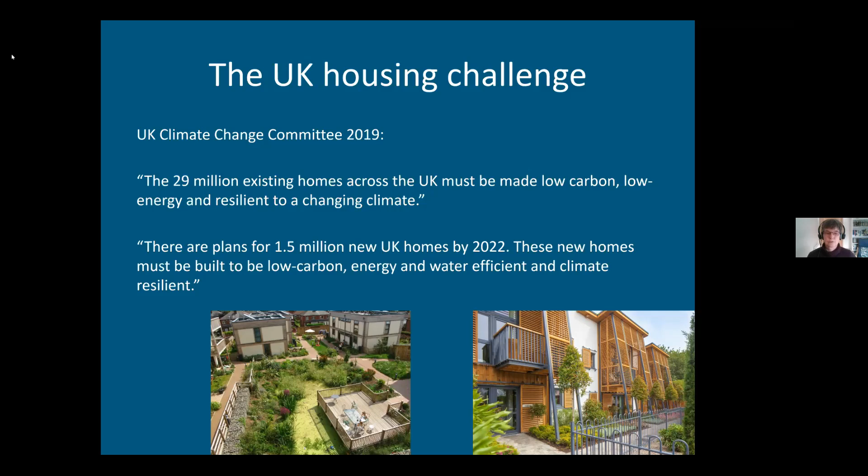And really, to set the background, the challenge is that we've got 29 million homes that are not fit for purpose and that we need to upgrade. And we're also trying to build a whole bunch of new homes very rapidly. And of course, these need to aim for zero carbon.

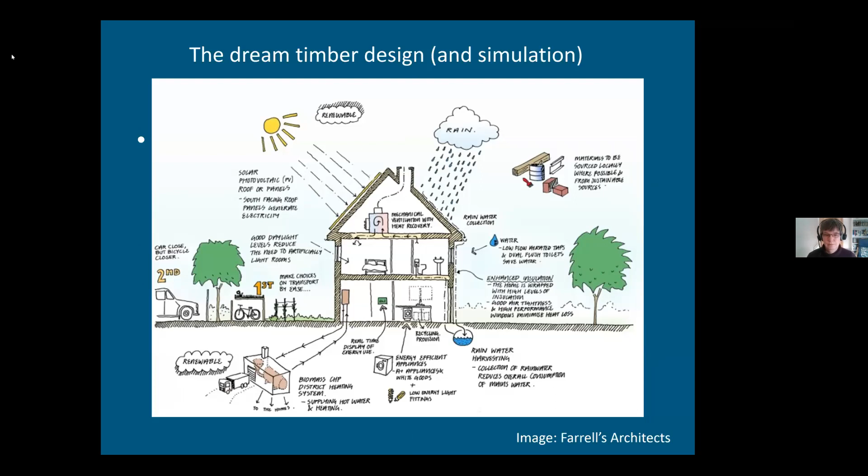This is the sort of typical drawing that we as architects start out with, the dream home, this one by Terry Farrell. But unfortunately, design intentions very often don't get met in reality. Here we've got three quick images, one on the left of residents desperately trying to create cross ventilation to cool their home using the traditional chair to wedge the door.

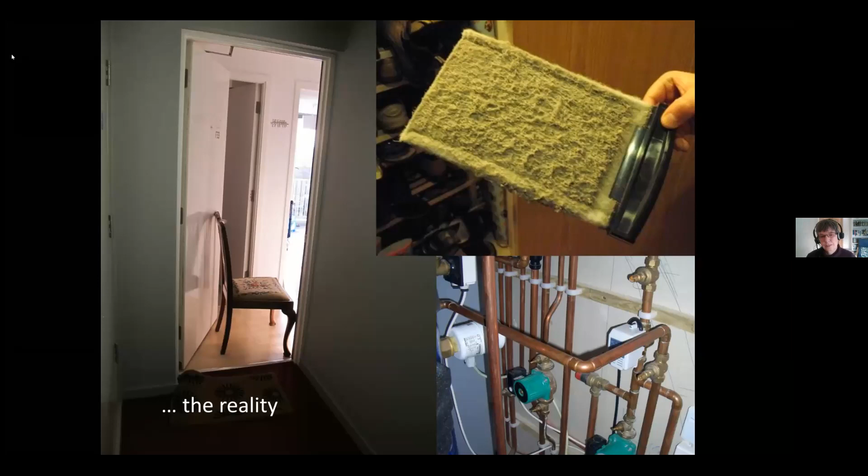Top right hand side, we've got a very filthy MVHR filter that not only the residents weren't aware of, but also the housing association wasn't aware of it either. Bottom right is good old fashioned plumbing. And unfortunately, we still see instances where plumbing is not properly insulated.

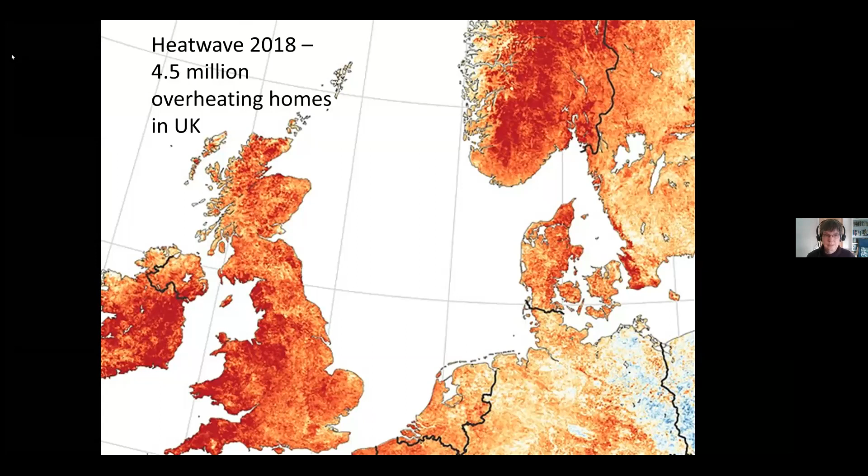The bigger picture, we had 4.5 million homes overheating in 2018. That's only set to increase. We also have about 5.5 million people suffering from asthma, and that is increasingly being related to issues in the home, whether it's toxic materials or simply mold from poor design.

So our homes are underperforming, and we regularly see homes using 2 to 3 times the amount of energy that they're supposed to be using. And that isn't just down to the occupants, it is often down to design and construction issues. So why is this happening? Well, basically, our design intentions are only as good as what we already know. There's no legal requirement to provide feedback from reality once we build our buildings. And so, quite honestly, we don't know what's going on.

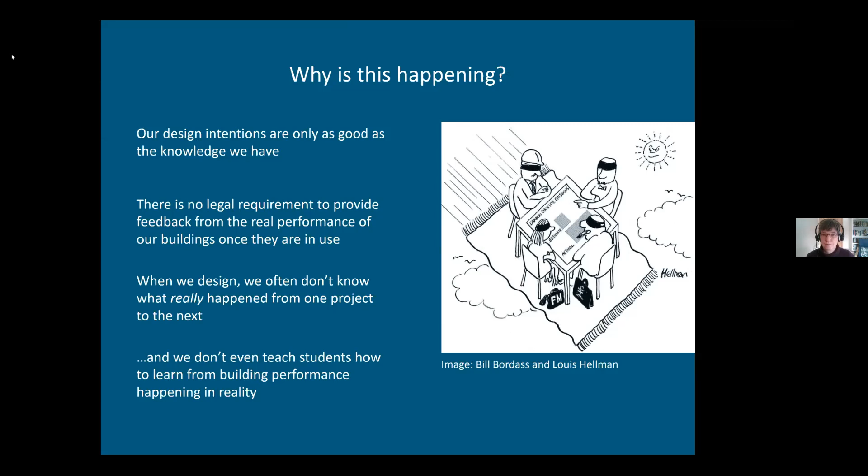And that's why I love this cartoon by Hellman, which shows the whole design team flying blind because we don't get feedback. And we don't even teach our students how to get feedback from buildings. So why is it a great thing to do post-occupancy evaluation, or the wider aspect of building performance evaluation, which means looking at the whole building cycle? Well, there are 7 reasons.

Basically, if we do POE as part of a wider building performance evaluation cycle, we can improve our products, our design, and we can improve the design process. We reduce risks and hidden liabilities by exposing them early on. We reduce defects by understanding them through looking at them. We reduce maintenance, again, by understanding what really happens once our buildings get rained on. We can future-proof our buildings by understanding how they're behaving in reality.

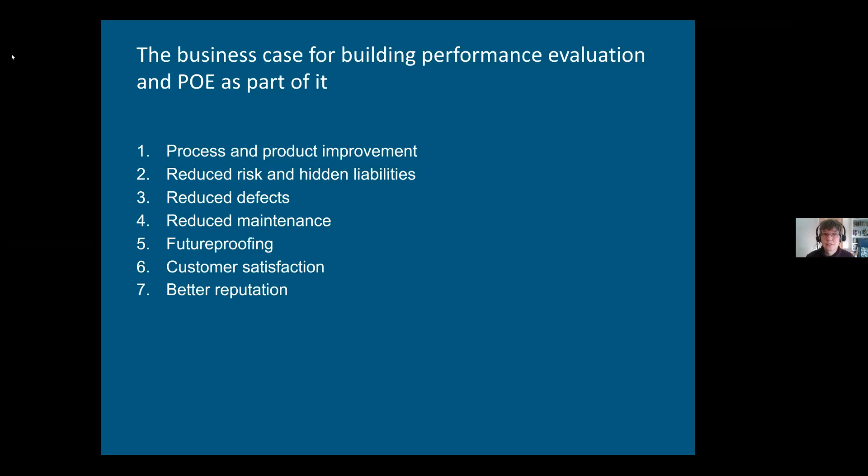And all of this will lead to improved customer satisfaction, a better reputation for us as designers. And what does that mean? Repeat business. So 4 quick questions when we're doing POE. These are the basic 4 questions everyone needs to have in their head. Is the home performing as it should be? Are people happy in their home? Are there any immediate problems? And how can we improve design and homes for the future?

We basically need to do this also to validate the very design modeling tools that we're using. Modeling tools are only as good as the feedback given to them, which is why most modeling tools are not particularly accurate. So when we're doing our performance evaluation for real, this is a key slide. We need to compare the design intentions to reality. That means looking at the original specifications and drawings and understanding any changes that happened. We need to look at a bunch of hard data, physical comfort factors, possibly pollution levels, certainly looking at the fabric performance, the energy use and the water use.

Then we need to look at the essential soft data that often gets left out of monitoring. And this is not just a customer satisfaction survey. This is about looking at people's needs and their capacities to use the buildings we design for them. And that's a different way of thinking about post-occupancy evaluation, not satisfaction, but whether the buildings we've designed are designed for the capabilities that people have. And that's particularly around control and learning of the equipment that we put into the homes. We then compare the hard and soft data with the original design intentions to revise and improve our design, and also to future-proof them.

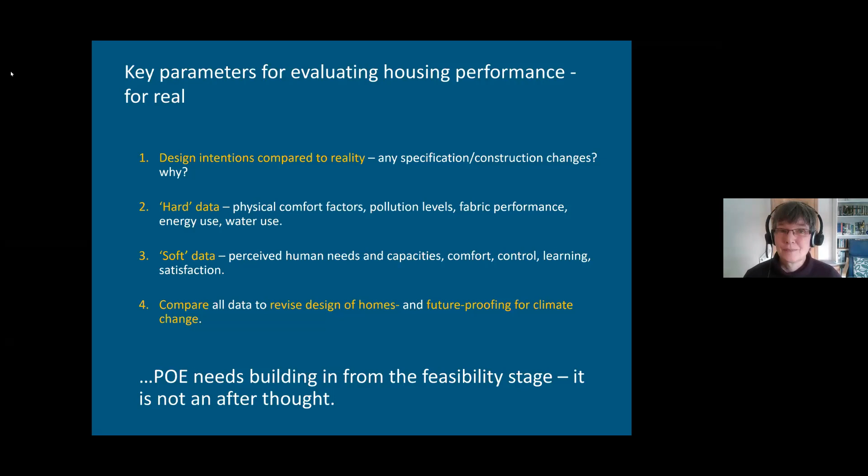Now, if you want to do this, you need to build in POE from the very beginning. Don't start thinking about it whilst you're designing. It's too late. It needs to go in at the beginning with the client at the briefing stage, at the feasibility stage. Otherwise, it becomes expensive. The other thing is POE can be cheap, very cheap. To do a light touch POE may be as little as £5,000 for a housing development, possibly 10. And once you've done that, if the home is performing as expected, you don't need to do anything else. You don't need to bean count. You don't need to do monitoring for the sake of monitoring. But if there are issues, you need to move down to the next level.

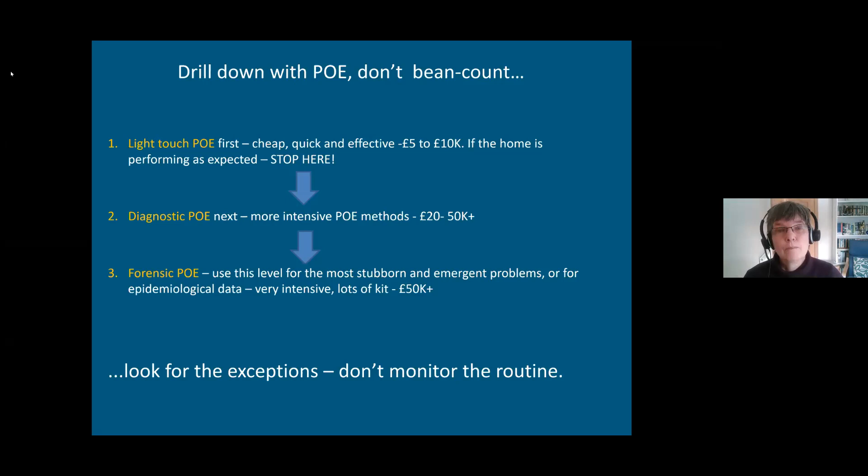Then you need to start diagnosing the issues that are thrown up by the light touch POE, and that is more expensive. And finally, for the most stubborn problems, you need to use forensic methods. But the key takeaway from this slide is you should be looking for exceptions, looking for things that stand out as not normal, not monitoring for normality.

So I'm going to introduce you to 6 initial actions that you can do very easily on any design project to get you going with POE. The first is to look at what the documents were, the original design documents and the specifications, and check those against the as-built. The next is a very basic energy and water use audit. And you can get this either from smart metering, or if you're dealing with old homes, you can get it from the bills.

The next is to do a thermographic survey. That does need some expertise, but just looking at one typical home inside and out can give you a wealth of data. Once you've done these, and these are in order, don't do them out of order. The order is logical. Once you understand the documents, the energy and water, and the thermographic survey, then it's time to ask the inhabitants what's going on. Quick survey, I'd recommend the BUS questionnaire or the equivalent.

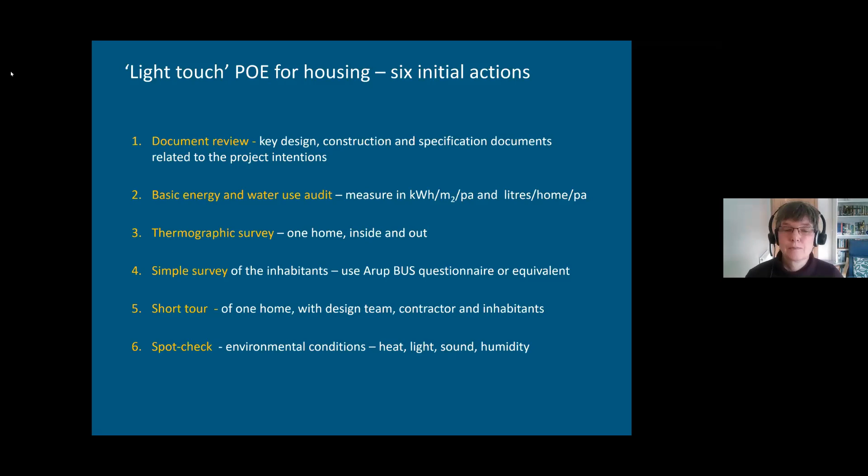And once you've done those and you have some understanding of what's going on, then it's time to do a quick walk around with the design team, armed with the information that you have from the first 4 methods, and to discuss what's going on. That will give you a much more valuable short tour. And finally, whilst you're doing the tour, you can do some quick spot checks. You can check the temperature, the light, the sound, and the humidity in the building on the spot and compare it to what the occupants are saying.

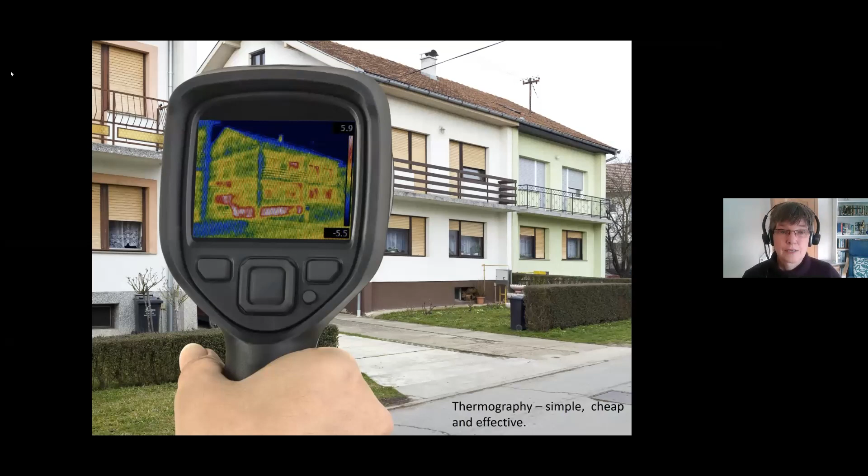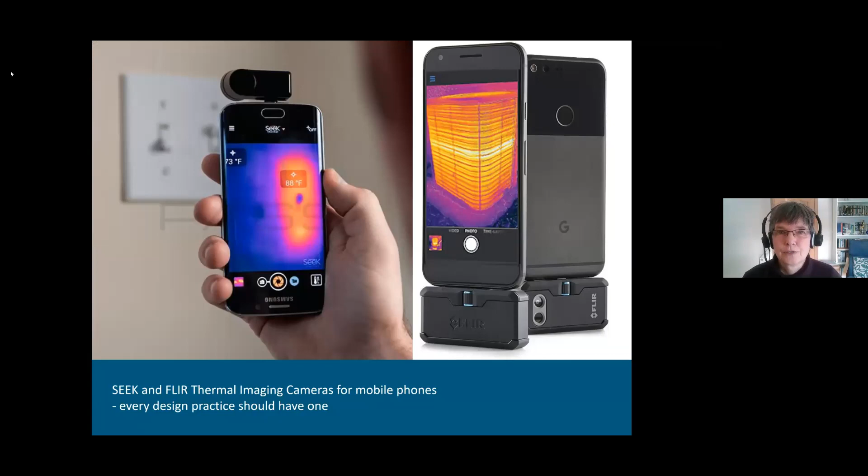You can do it via the phone. There are very simple devices now that you can attach to your phone for £200 or £300. Pop this in your pocket, take it out on site and use it. It's criminal that we're not using these already. You can also invest in one of these, which is a simple 4-in-1 meter, not particularly accurate, but it does give you on the spot ballpark readings. If the occupants are saying that it's too hot in the home, it can be well worthwhile doing a few spot checks on a home tour to see whether that's actually being borne out, equally with the humidity or the noise levels.

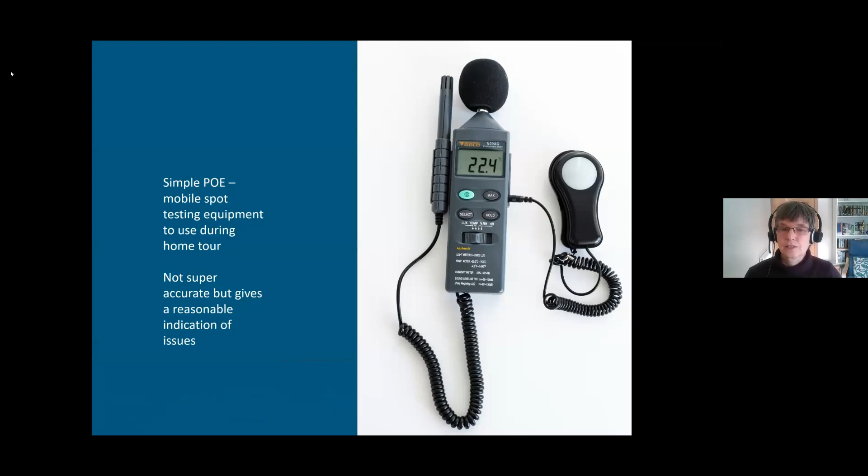So I'm going to just spend a few minutes now taking you through a case study to show you POE in action and making a difference. So this was a study we did a few years ago in the north of England, a very well-known architecture practice I'm not going to name. We're looking at a 1960s block here, of which there are many that need significant retrofit. This was a deep retrofit done. We went in to do a light touch POE, which we then needed to follow up with a diagnostic POE to understand what was happening.

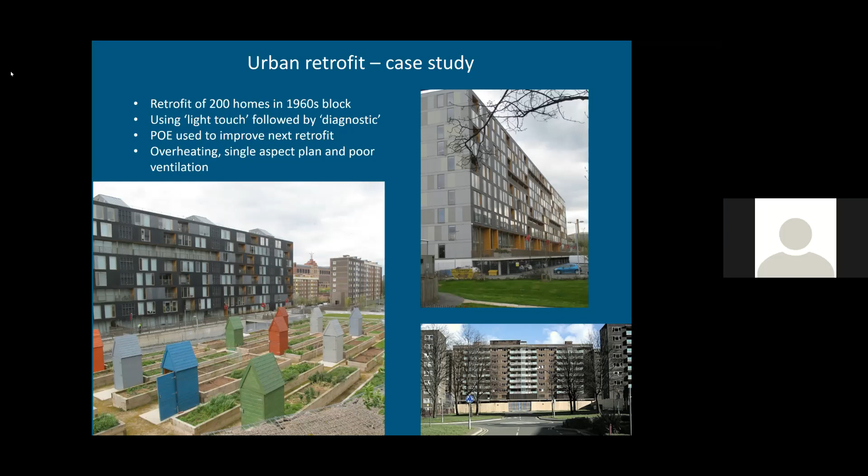The big issues that came out with this particular project were overheating, the fact that the architect had turned a perfectly good plan with cross ventilation, a generous housing plan, into a single aspect plan. And a single aspect plan, believe me, I know they're sexy at the moment, but they are time bombs in terms of ventilation strategies. Please avoid single aspect. I'll show you the reason why. This is what we discovered. Here is the single aspect plan.

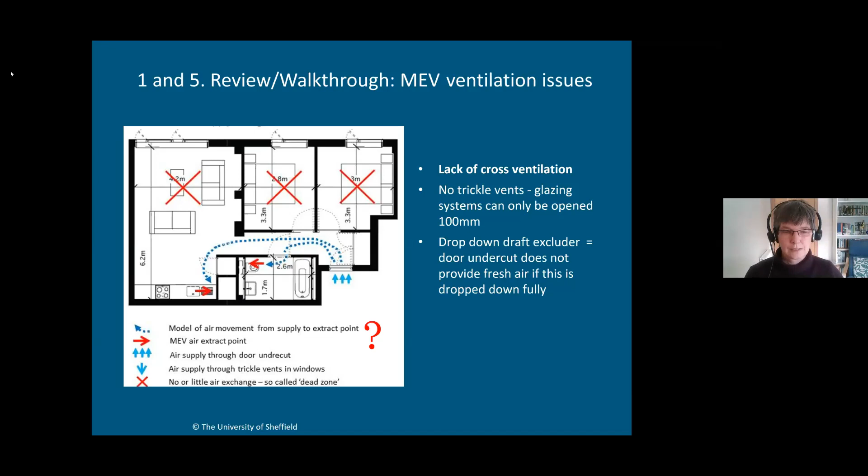And once we'd got the questionnaire back from the residents, we did the walkthrough. We'd also looked at the drawings, and we worked out very quickly that there's what we call a ventilation bypass. So what was happening here was there were no trickle vents. Any glazing that was developed could only be opened 100 millimeters. That's really small. And the drop-down draft excluders were not allowing, there was a conflict between fire regs and the need for ventilation. So basically we had a pressure cooker here, where the mechanical ventilation was extracting from the front door through the cooker, out through the block, and none of the rooms were getting decent air. So we had to go in depth, and that meant we had to start measuring airflows.

And we then were able to forensically diagnose that, in fact, the mechanical ventilation system installation was appalling. There were meters and meters of flexible ducting, which of course should be minimized for any MVHR installation. The commissioning was incorrect, so the flow levels had not been properly calibrated. I mean, basically, it was just a disaster.

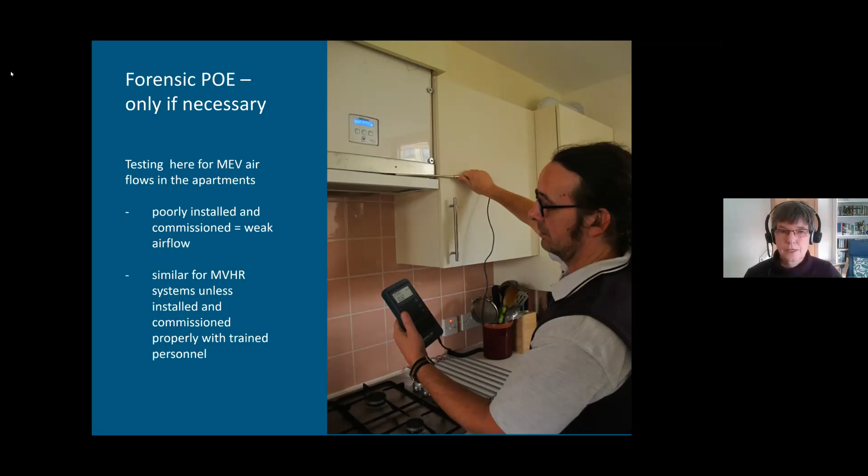And we then looked at the energy use, and normally people say, well, the energy use is due to what the occupants are doing, and that can often be true. However, the energy use was consistently over what had been predicted. And reasons for that excessive energy use were people were beginning to bring in their own devices to do their own cooling, because the design fault was that the buildings were overheating.

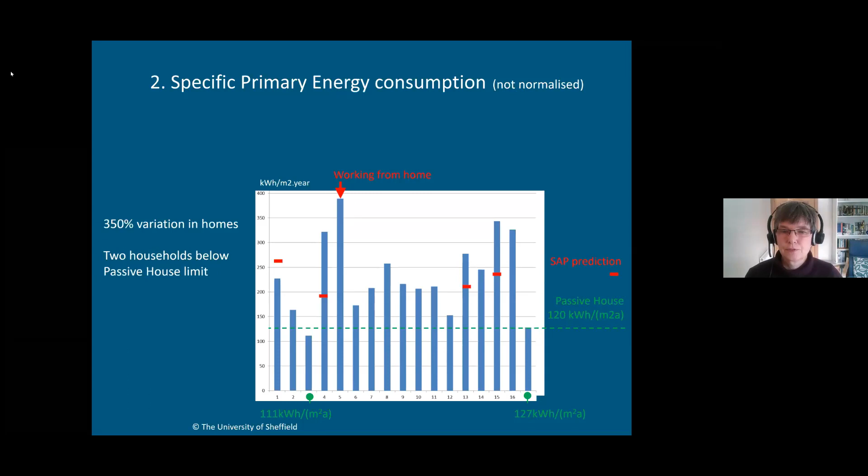So we did some thermal imaging, and one of the interesting things we found immediately was a stack effect. This is called stratification. You'll get this a lot, not only in blocks of housing, but also within the home. Key law of building physics is that heat rises and cold will drop in to replace it. So here we have a stack effect within the core, the stair core of the building. And of course, that heat then diffuses into the flats.

So basically, if you lived in the top flats, you were getting cheaper heating in the winter. And of course, the ground floor was a lot cooler, and that was performing as designed. But the top floors were a lot warmer in the winter and really difficult to cool in the summer.

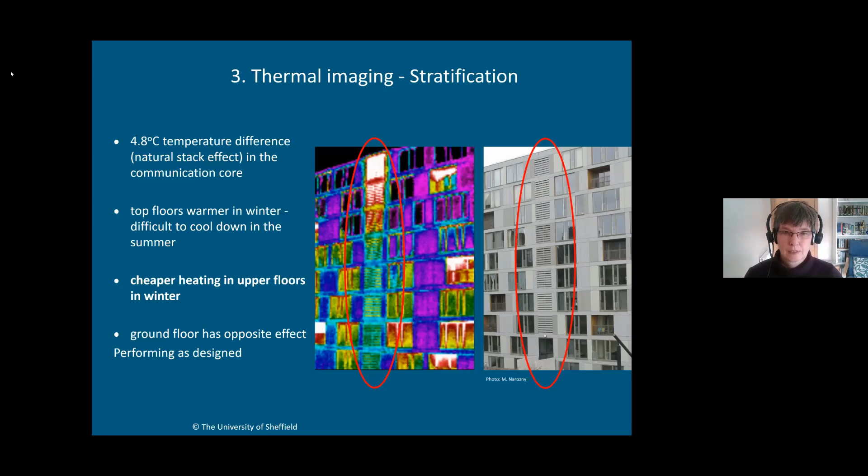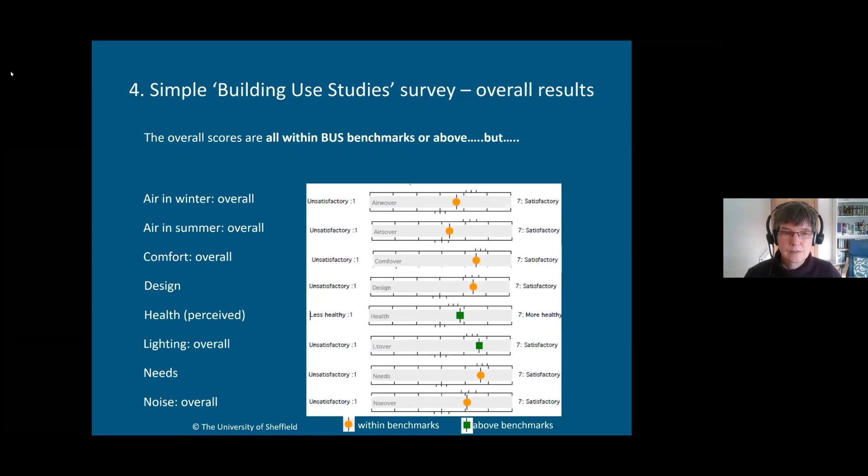So we asked the residents what they thought. This is a quick overview of the different questions that are asked of the occupants in the BUS questionnaire, and it looked from the BUS survey, having asked all 200 residents what they thought, that basically this looked okay. The amber shows that it was within the benchmarks, and the BUS survey has thousands of studies now from offices, and hundreds and hundreds from housing developments. So they're very good, robust benchmarks. And we could see here that in terms of health and lighting, the homes were doing well, and they seem to be doing okay on comfort as well.

However, when you dig into the detail, it's a well-known psychological fact that if you ask someone generally how they're doing, they'll say, fine. And if you then drill down into some detail and ask them more specific questions, they will often say, not fine. So someone will say, fine, if you ask them how they're doing. And then if you ask them, how are your feet today? They may well say, well, actually, I did twist my ankle last week, but it's healing up okay. And exactly the same happens with buildings.

So people say they're generally happy with the building. There's a big forgiveness factor, maybe because it's a sexy looking design, and actually they will compensate for the fact that it's not performing because it looks good. But as you can see here, massive issues. Severe overheating in the summer and severe cold in the winter. And there are the red dots. So it's important with POE that you do dig in and just don't accept things at face value.

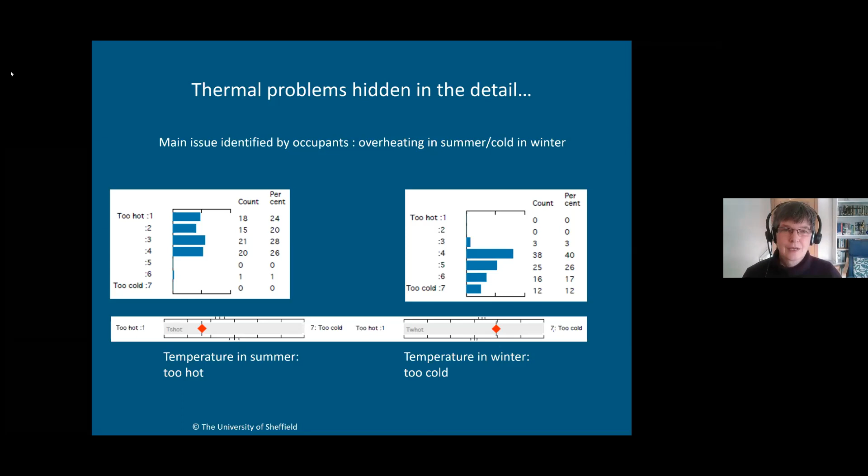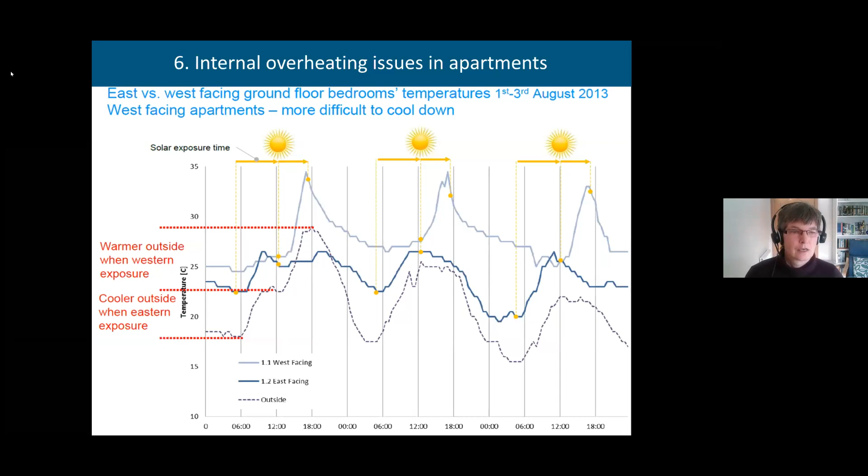Now, why was this happening? When we started doing the forensic monitoring, not just the spot checks, but now looking at more detail, we found that the western single aspect homes were just set up to cook. Huge windows, no shading, looked very good. And facing the west. So, of course, what was happening was massive warm up. West-facing windows, large windows are probably the worst in the summer because the house is already warm when the sun continues to shine in the afternoon and the evening. So we were getting regular 35 degrees inside when the temperature outside was a lot cooler.

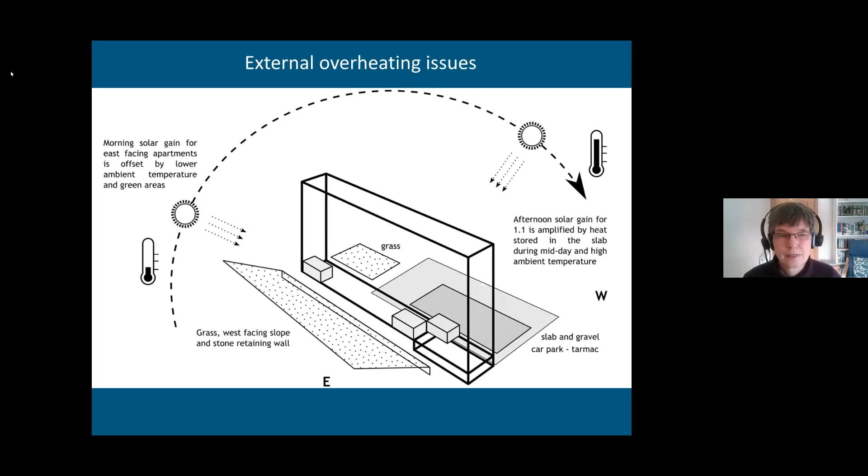And what we did was we diagnosed further, and we discovered, as you can do with POE, that there were other bigger issues. And here we have an external environment issue, which was the block was designed and renovated whilst the existing car park was not, and that's black. And basically you have a great big black heater there throwing heat into those western facing apartments. So again, really set up to cook.

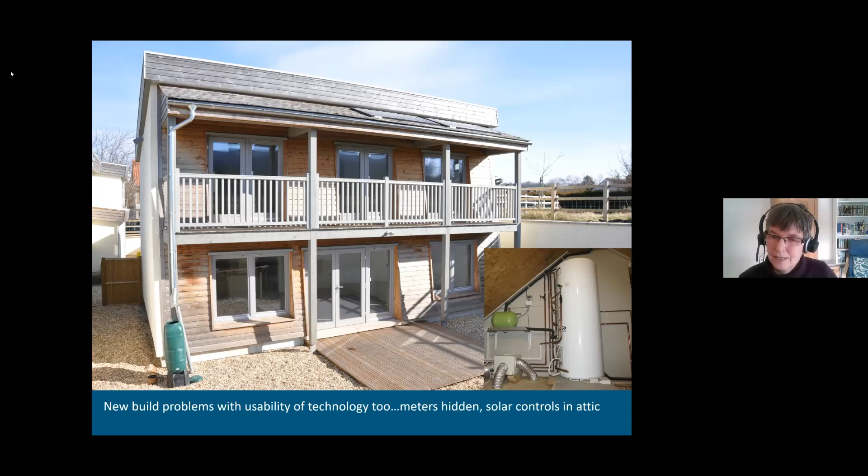So other great things about POE is you can actually use it to validate your design intentions. So if you're dealing with retrofit situations, this is an Oxford study by Professor Rajat Gupta from Oxford Brookes University. And here he actually interviewed the occupants and audited the energy before even doing the POE. So he established benchmarks, reality benchmarks, before the retrofit was done. He also asked the occupants what their real needs were, and he built that into the POE design, which gave a fantastic result at the end, a finely tuned POE that actually really paid attention to the residents.

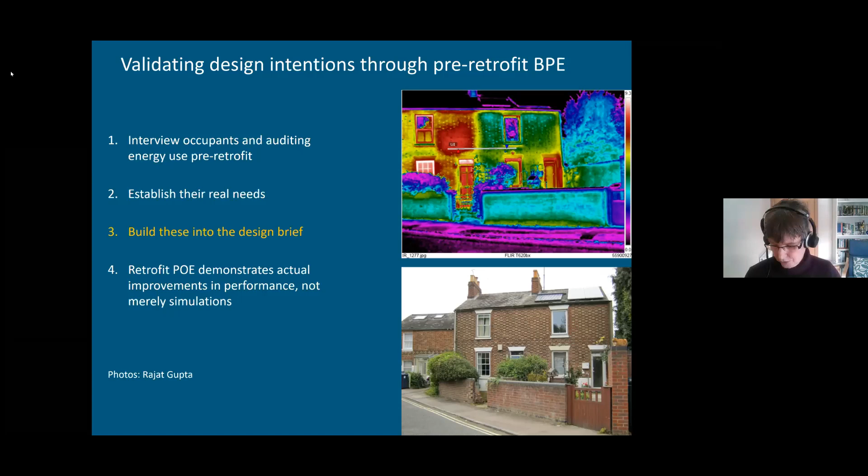So we can use BPE and POE to improve design. We can roll our findings on through BIM, through workshops. People like architects have done this for years. We can also empower the inhabitants we work with, particularly for new housing models. Co-housing, cooperatives, build to rent, social housing all offer opportunities to actually work with the incoming inhabitants to develop the post-occupancy evaluation process they're going to be part of. And that actually gets you buy-in from the very people that you want to buy into the study that you're going to do.

And all of this leads to a fantastic organizational learning cycle where we get occupant feedback, performance feedback from the building, going right back to the beginning of the building life cycle. And we develop what I call the organizational smile, better buildings. The good news is that beyond the book that I wrote a couple of years ago now, more building performance evaluation guidance is developing all the time.

And just a short time ago, a fantastic organization called Wood Knowledge Wales developed this building performance evaluation guide, which is free online, and it's very detailed. It has detailed technical guidance with a toolkit which has guidance sheets for each of the POE methods it's advocating. It's aimed at housing, but frankly, you could use it for most building types, and probably as the first port of call. Doing myself out of my book, I would send you there first.

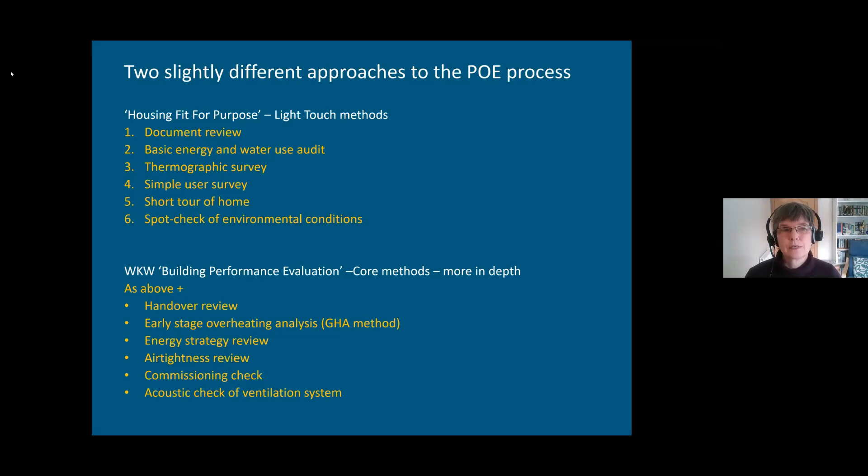The Wood Knowledge Wales guidance, which I was an advisor on, has gone for more depth, and it includes all of the above, those core methods, but it also adds in a handover review, the GHA, Good Homes Alliance, overheating method. It also builds in an energy strategy review, a recheck of the airtightness, a recheck of the commissioning, and a double check of the acoustics. So it is more intense, more expensive, but very thorough. I would still argue that you could start off with the initial light touch and move on to the other stages if necessary.

So I finally want to introduce you to the Building Performance Network UK, which I'm the campaign director for. And this is a national organisation. It's one of a group of organisations working under the Sustainable Development Foundation. So others you may have heard of include the Good Homes Alliance, the Alliance for Sustainable Building Products, and the BPN is part of that family of organisations that are working to improve design. And my role in this organisation is to encourage you to join it, to become a part of this network.

We've already carried out a State of the Nation review on the performance of homes, which is accessible on the site. But we're really looking for people from Meshworks and beyond to collaborate with us, to collaborate with Meshworks, to share our data, to create a data sharing platform. We're looking to create a portal, not necessarily to host the data, but we'd like to be the go-to place for building performance evaluation. So I'd welcome you to have a look at that.

So just to bring the talk to its conclusion, in terms of thinking about post-occupancy evaluation, or as people sometimes prefer to call it, occupancy evaluation, with post-occupancy being a bit of a misnomer, it's really now or never. We've got the new Future Homes Standard consultation on the table again from the government. And once again, the government is failing us because occupancy evaluation is not there. It's not in the building regulations. So frankly, it's up to each one of us to do it.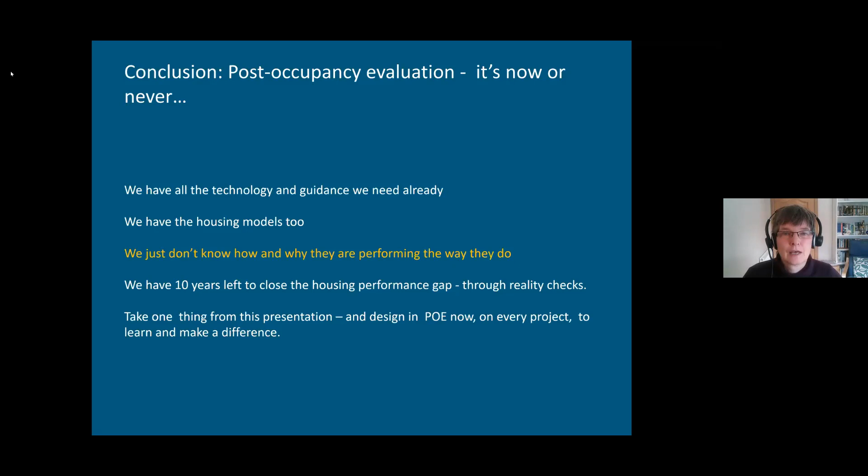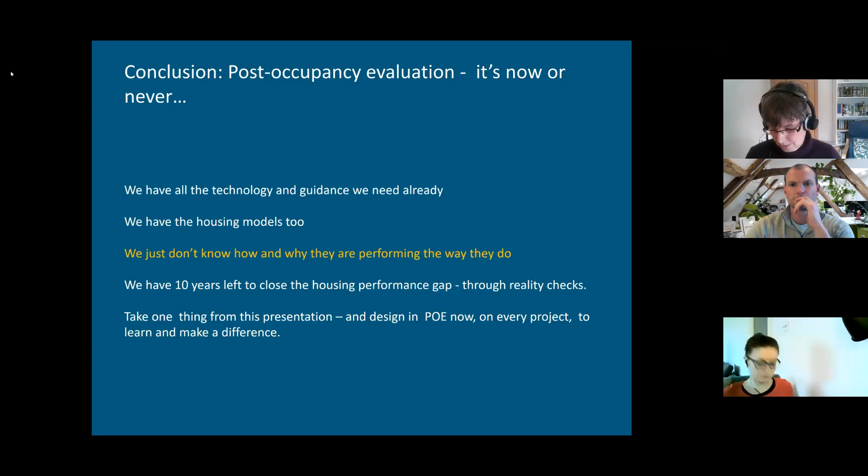We have less than 10 years now to close the performance gap in terms of making sure that our buildings are reaching zero carbon. We have everything we need, but we're just not doing it. So I really hope from this post-occupancy evaluation presentation that it's given you some insights into what you can get out of it, how to do it. And I'm very happy to take any questions either about the presentation or more generally about post-occupancy evaluation. Thank you very much, and look forward to the discussion.

Great, thanks, Fionn. That was really, really interesting. There's so many bits to that presentation that we could discuss, and I think we've got some great questions as well, which we'll go from.

The thing that particularly sticks with me is the cost uplift, and if we start just doing something, even at a very, very low cost, it can be massively enlightening. You don't have to spend thousands and thousands of pounds to get to the bottom of some of these fundamentals. It can actually be done just by asking some simple questions, say by way of a questionnaire, or looking at energy bills, or really light touch stuff.

So we have got some questions here. I punched up a couple of questions. I know Charles and Rachel have asked some great questions. Let me start with Charles's actually. I think he dropped it in before you were talking about cost, but Charles said, isn't the current problem that POE has a cost attached to it and no sponsor, which is an interesting angle. So nobody's owning POE at the moment. It's this kind of floating thing that people hopefully see the benefits for, but there's nobody actually responsible for delivering it. So the question is, who should bear the cost, and who should own POE?